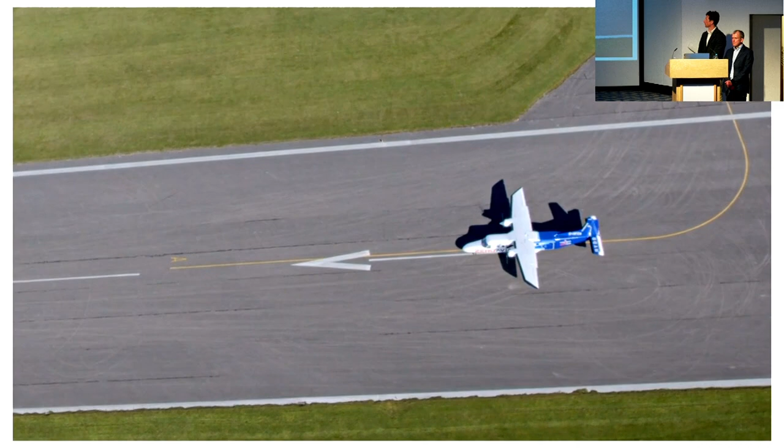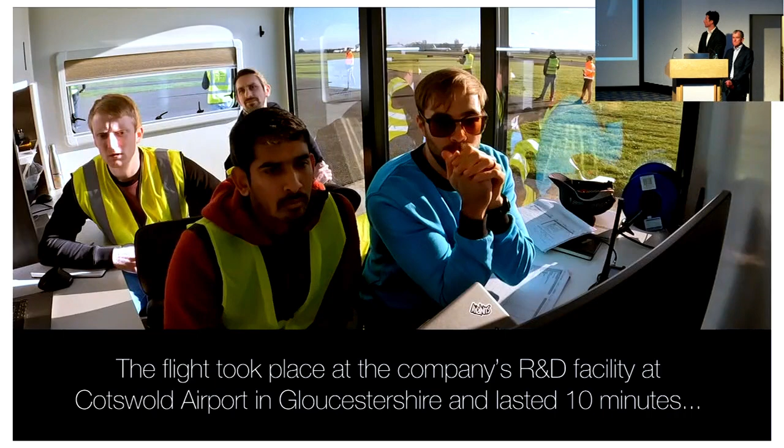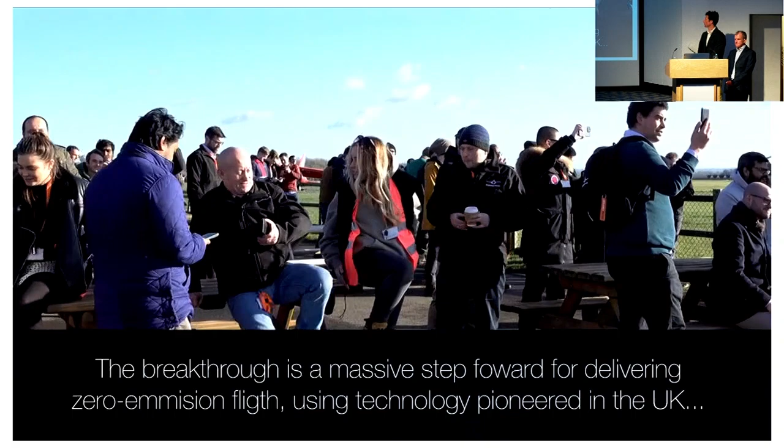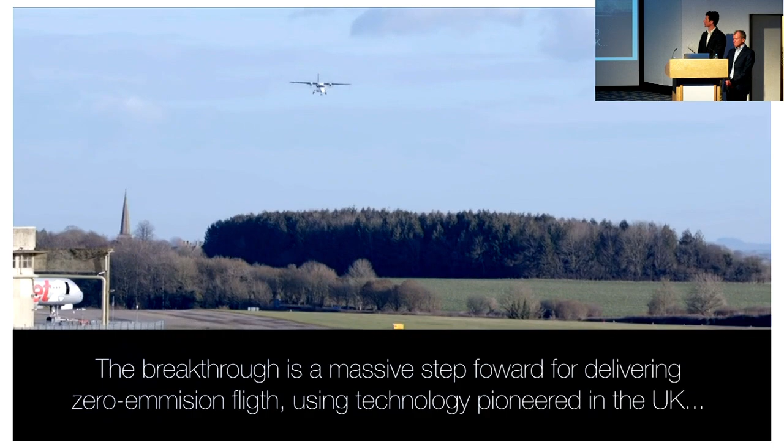Tango, contact tower, will make it 5 Quebec. Final line at 1. You ready? Doors and windows, door lights out. Takeoff brief is complete. Zero Alpha, runway 26, the wind 320, 5 knots. Take off your discretion. Temperature's good, temperature's looking good. Zero Alpha is downwind full stop at level 2,000 feet. Zero Alpha, full final, number 1. 120 knots. Zero Alpha, runway 26, land your discretion to wind 280 at 5 knots. This is still really good. Voltage has gone high with 790 reducing.

So hopefully that has whetted your appetite. This evening, this is what John and I will take you through. First of all, why we as a company are working on hydrogen electric. Then some of the technology behind that powertrain, principally how a hydrogen fuel cell works. And then how John and the team took that forward to that first flight that you've just seen in the video. And then I'll talk about how we progress that into a commercial future.

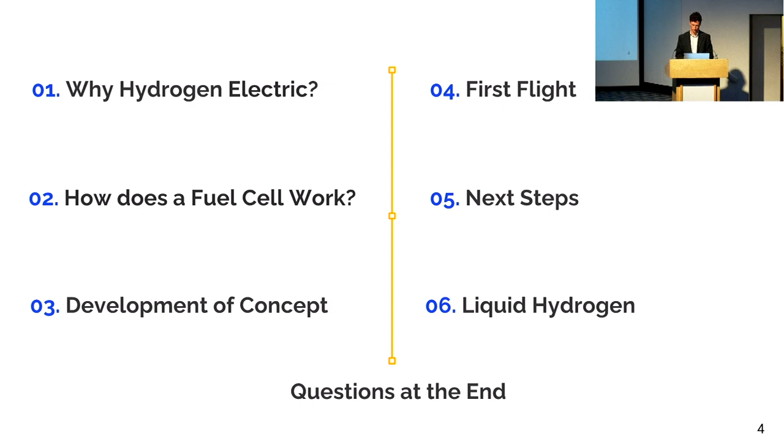So first of all, why hydrogen and electric aviation? Well, I guess the world is faced with that competing argument that aviation has got huge societal benefits, quite neatly summarised there by Bill Gates. But on the flip side of that are massive environmental and sustainability side effects. You can see in the graph that it's predicted that the use of aviation increases almost exponentially between now and 2050, but that drives a 25% increase in CO2 from aviation, whereas the world's intent is to drive those CO2 emissions down to net zero.

So it feels like we are at the threshold, the birth of the next aviation age, where the Comet ushered in passenger jet aviation for the masses, but now the world and our small part in it needs to take that on and make it sustainable so that everyone in the world can experience the benefits of aviation. Of note, only so far 10% of the world's population have flown in an aircraft, so there's a real driver for that increase in the use of aviation. So that's the problem set.

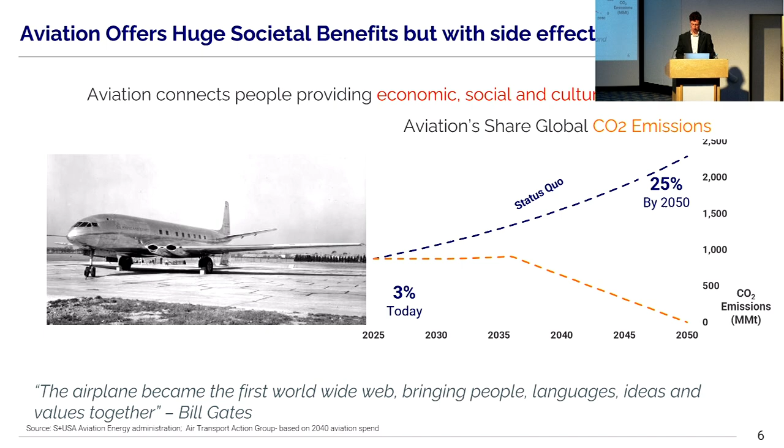Now we in ZeroAvia have focused on hydrogen, and in a minute I will talk about how that fits into perhaps the broader green or net zero solutions.

Hydrogen, as you all know, is abundant. Unlike fossil fuels, which we're going to run out of, 75% of the universe's mass is made up of hydrogen. It's got 3 times the energy density of jet fuel by weight, but the problem is in its gaseous form, it's very low density. That means that in, for example, those test flights, we had to store that hydrogen at 350 bar. That drives a large tank in terms of the strength you need, and thus the size of it. You really can't generate high pressures without a much larger and uneconomical tank. So we can use hydrogen, but it takes up a lot of space in gaseous form.

Maybe liquid hydrogen is the solution, but one of the troubles with that is its boiling point is minus 250 degrees centigrade, so that brings in a whole host of questions: how do you store liquid hydrogen, how do you produce it, and how do you then use it in an aviation context. All of those problems will start to unravel, hopefully, during this presentation.

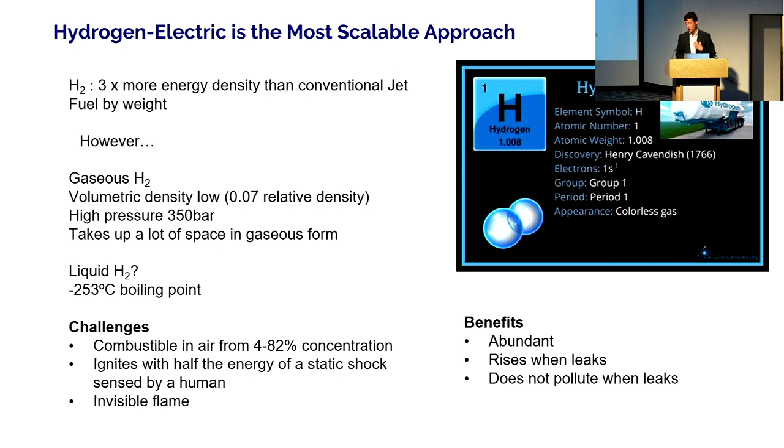So that's the challenge in front of us, but the reason why hydrogen, I genuinely believe, has got a key role to play in that kind of portfolio of green solutions.

We've got hydrogen electric, which is the ZeroAvia solution. That drives quite a bit of weight at the moment, and John will go into that powertrain shortly. We need to work on solutions for how you can store it in the smallest volume possible. Another problem is we generally store aviation fuel in the wings at the moment. Those wings, you can't store gaseous hydrogen or keep liquid hydrogen cooled in, so we need to store our hydrogen fuel in a different part of the aircraft.

The next one is you can combust hydrogen in turbines, for example. That does reduce CO2 emissions, obviously, but you cause other non-CO2 impacts, such as contrails and generating nitrogen oxide fumes. And you need to consume a lot of hydrogen, so you need even larger fuel tanks for that.

And we've got battery electric, and there are certified training aircraft out there, the Pipistrel Velis, but with current battery technology, such as lithium ion, it's heavy, so you really can't upscale that battery technology into larger aircraft. In my previous role, we flew the Pipistrel Velis electric aircraft, the two-seat trainer, but with that battery technology, you broadly got a maximum of a 30-minute training flight out of it. So not yet matching aviation fuel's performance.

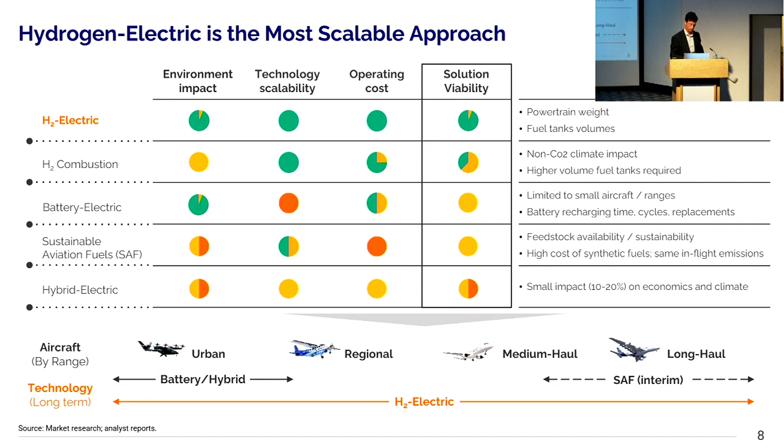So I'll hand back to John to talk about how fuel cells work. Oh, sorry, I've gone the wrong way. Classic.

Thanks. I'm going to caveat this with: I'm a pilot, not a physicist or a chemist, but that means it's going to be a simple explanation.

So the working principle of a fuel cell - fuel cells have been around in technology in other applications for quite a long time. We're using a proton exchange membrane type of fuel cell. It has a polymer and electrolyte catalyst that essentially separates the proton and the electron from the hydrogen molecules that enter at the anode. That electron is then used by us to generate an electric current to power our motors and turn the propeller. The combination on the other side with oxygen creates the byproduct of heat and water.

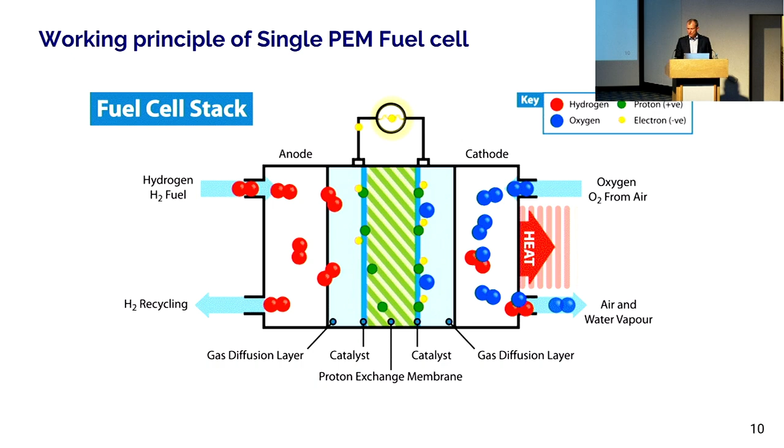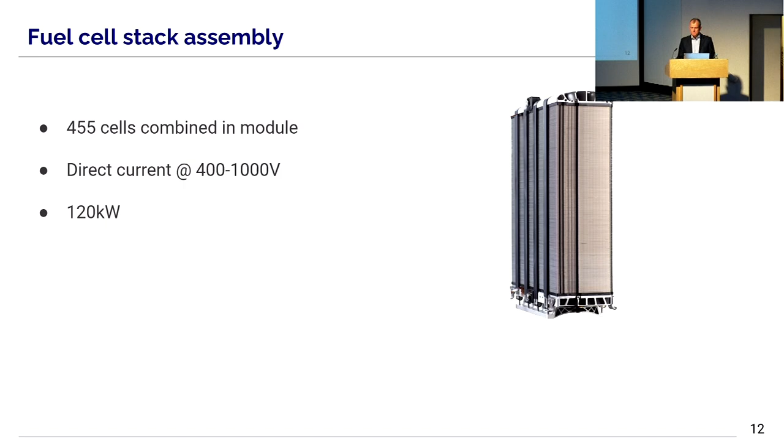We put 455 of those cells, combine them in a single module, and that will generate around 400 to 1,000 volts of direct current at about 120 kilowatts. So it's a building block approach, multiple cells combined in what we call a fuel cell stack.

We have to supply the hydrogen. As Adie's already mentioned, it comes from a gaseous form in a tank inside the aircraft. We provide oxygen to the cathode of the fuel cells, and that's provided in the form of compressed air. So that is compressed by a compressor similar to a turbo on a car engine, and is fed in at the correct partial pressure of oxygen to generate the chemical reaction.

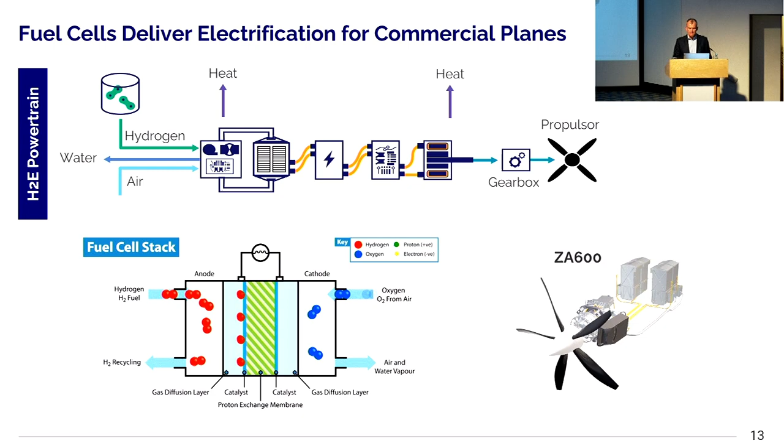That electricity is then dealt with through cabling to inverters that convert the electricity to AC current to drive the electric motors. The testbed aircraft that we're flying, and I'll talk more about that in a bit, includes 4 electric motors and 4 inverters, and they have a direct drive to a propeller.

Obviously, the 2 byproducts mentioned from the chemical reaction are heat and water. So we have to deal with that within the fuel cell system, and we include what we term a balance of plant. That includes the compressor, conditioning for the air going in, removing any particulates that may be in that air, compressing it and feeding it into the fuel cell. And on the other side, the hydrogen management is taking the gaseous form inside a tank that's in the fuselage through a pressure reduction down to around about 7 bar operating pressure that feeds into the fuel cell.

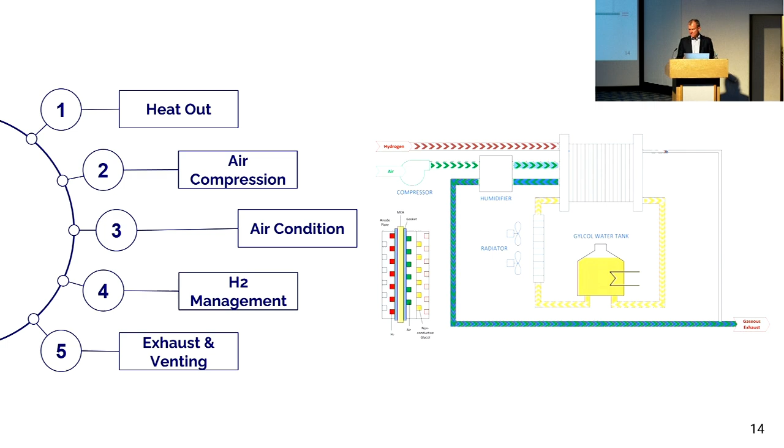The byproduct of heat obviously has a significant impact. The fuel cell operates at an optimum temperature of around about 68 to 70 degrees. That means that the water coming off very, very soon is forming a liquid form, and that's evacuated through an exhaust pipe under the aircraft, and you'll actually see that in a short video later. The heat is removed from the system by a liquid cooling system, much like you'd have in a car with the radiators, and airflow through the radiators on the outside of the aircraft, cooling the system, keeping it at the optimum temperature of 70 degrees.

Our total infrastructure looks something similar to that. You can see the motor and inverter unit at the front, the fuel cell stacks with balance of plant. The current system that we're operating weighs around about 190 kilos.

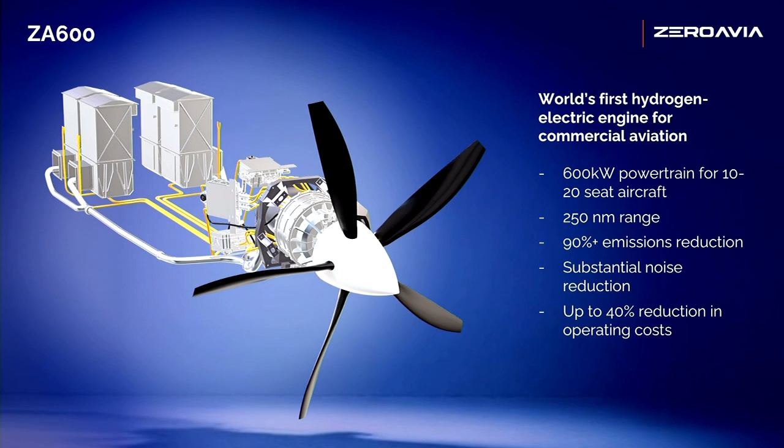It's nominally 600 kilowatts. At the research and development phase, we're generating around about 400 kilowatts of usable power, but our first product, the ZA600, will be operating up to 600 kilowatts, which will give us around about 250 nautical mile range with 90% emission reductions. We don't have the noise of a jet engine, obviously, but a lot of the noise is still generated by the propeller, and we estimate a 40% reduction in operating costs.

The test aircraft, in terms of our redundancy, we've got two 455-cell fuel cell stacks that generate around about 120 kilowatts each, and we've got a set of batteries that will generate an equivalent power. So in terms of redundancy for our flight test campaign, we've got two of the motors that are powered by the fuel cells and two of the motors that are powered by the batteries. The reason for that was there was input from the regulator very early on that because this was new and novel, they wanted to have some form of redundancy.

Essentially, because of the choice of aircraft we're using, we've got the turbine engine still on the right-hand side. So from a test and development program, the aircraft is safe to fly on one engine, but we've got that further redundancy.

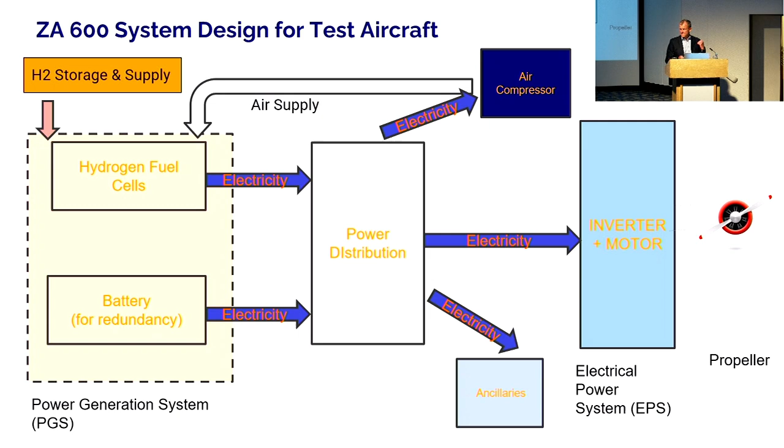The important thing to note, and the reason I want to talk about this slide in particular, is that if you look at the total weight of the fuel cell systems including the tank, for the same amount of flight availability and power generation, we've got over double the weight of batteries to provide the same amount of power. The battery weight at the moment is 900 kilos, and the fuel cell weight including the tank is around 450 kilos, with 5 kilos of hydrogen. So that puts into context the figures that Adi was talking about earlier.

So we've put that into a Dornier 228 aircraft. It's a fairly old platform. The aircraft we're flying was built in 1985, but it has incredible single engine performance. It's actually possible, although not certified, to take off from a standstill on one engine, and although not required for our flight performance, that's an amazing safety factor to have during a flight test campaign.

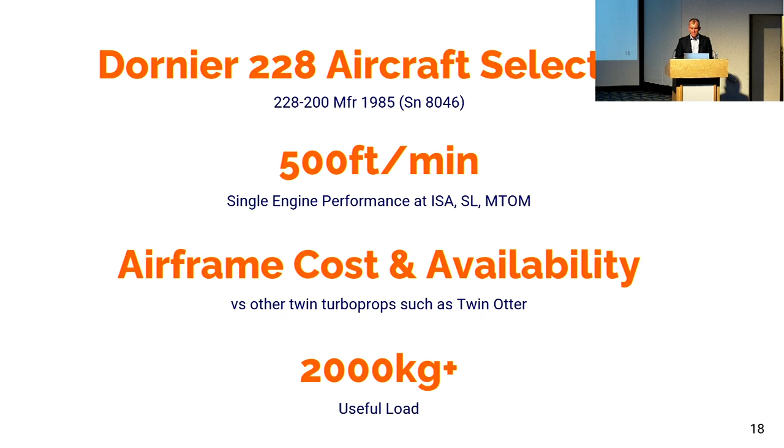There is a trade-off effectively between cost and availability. There are a number of other aircraft that would be equally good - the Twin Otter is a great example - but the net cost of the aircraft compared to the operating cost is a significant factor for us as a startup company. And we've got a very good useful load, so we're able to carry 2,000 kilos of weight.

So inside the aircraft, in the picture on the left, that's looking from the cockpit to the rear. You can see the hydrogen tank - that's 5 kilos of hydrogen in gaseous form at 350 bar. We've got the 2 stacks of batteries, which are lithium iron phosphate batteries, and right at the back are our 2 fuel cell stacks with balance of plant.

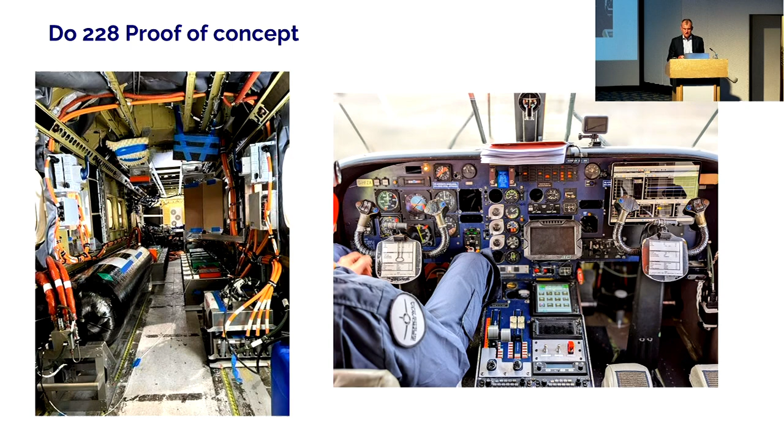Here it is in a little more detail. On the right-hand side, press the right button, we've got a tablet display. That gives the flight test engineer a bit more information, in particular about the operating temperatures of the fuel cells, so we can keep them within limits. We've got the pilot's display, which you saw in the previous picture, and you'll see that in another video and the next slide. Controls for the high voltage power - you can't see the low voltage power controls, but they're just down here. And that's me.

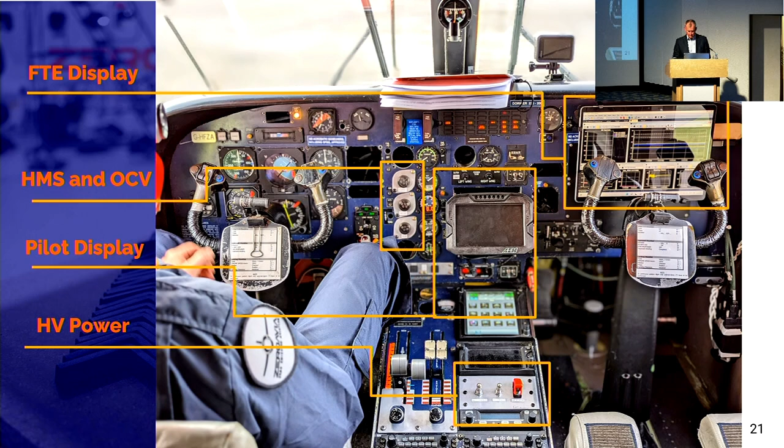This display is if anybody's into motor racing, you might recognise it. It's an automotive type display that's been customised to provide control information for the electric powertrain and associated warnings that might be associated with operating it.

Essentially, from a pilot's perspective, control of the electric powertrain is a torque control. So we'll demand per leg around about 800 newton meters of torque during the takeoff roll, and then we'll have a max continuous power of about 750 newton meters per leg. That's at the maximum power rating of 120 kilowatts per leg.

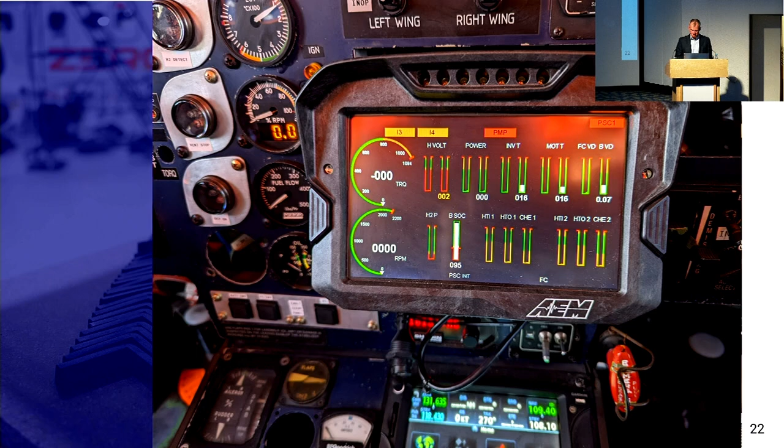We started our ground test campaign with a series of bench testers, and the aircraft was delivered to us in November 2021. We went through commissioning and ground testing before our flight test, first flight on the 19th of January. So from flash to bang, a very fast and rapid integration into the aircraft.

We use a lot of the existing technology for fuel cells, the experience for that, and electric powertrains comes from the automotive industry. So we have integrated a lot of automotive expertise into a new and growing aerospace company, and that comes with certain challenges.

We've looked at preparing not just the aircraft for flight test, but preparing the team, getting a group of very clever and motivated people to understand the aerospace aspects and the importance of safety and understanding the known unknowns into a test campaign. Part of that was the ABC of testing: assume nothing, believe no one, and check everything. You've got to have that rigour throughout that programme, which is the importance of bench testing, ground and commissioning and ground testing before you then go to do your successful first flight.

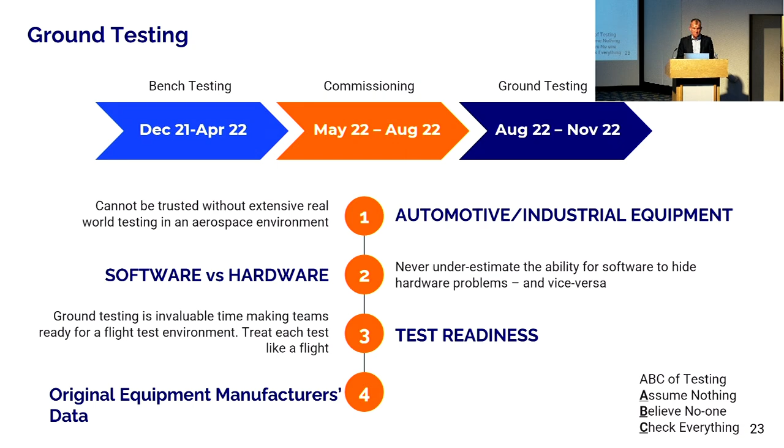This is an example of one of the early ground tests. This is the first fitment of the fuel cells into the aircraft. You can see a little bit more detail. Most of this is the balance of plant of the fuel cell. This one is end-on and this one is side-on. The conditioning for the air takes up the majority of the space within there. The actual fuel cell you can't see, but it's just a small kind of battery-sized device at the bottom.

It looks fairly rudimentary, but essentially once the fuel cells were in and were commissioned, we needed to have pipes running out to get rid of the electricity that they're generating, because we weren't sending that to a motor at that point, and that goes into a load bank. So the cables that you see there are all going off to load banks. This is low power testing, but it's that first commissioning run of the fuel cell. I took this video with my phone, so I do apologise for the quality.

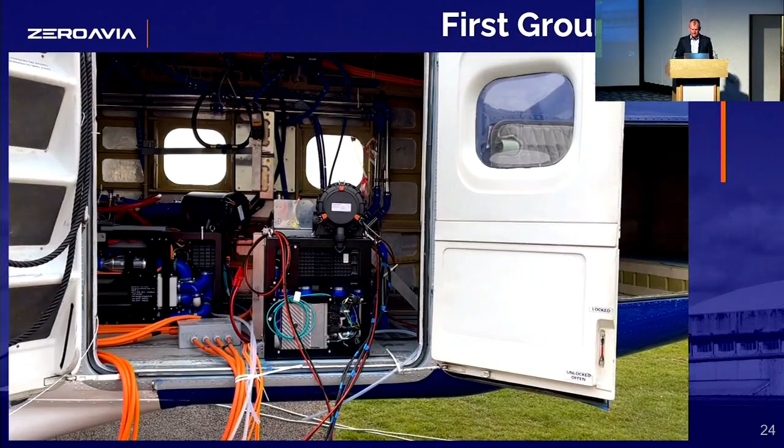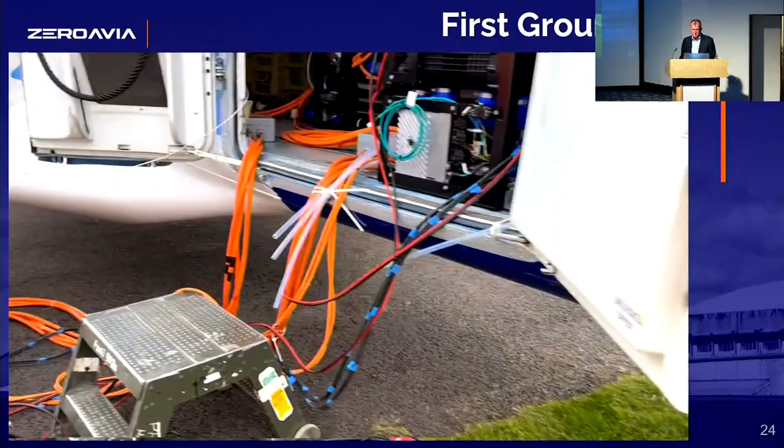That's the exhaust there, where the water vapour comes out. I think the important thing from a flight test perspective is to understand as much as you can on the ground, because on the ground it's ground zero. Once you get airborne, you don't want to be discovering new things in the air.

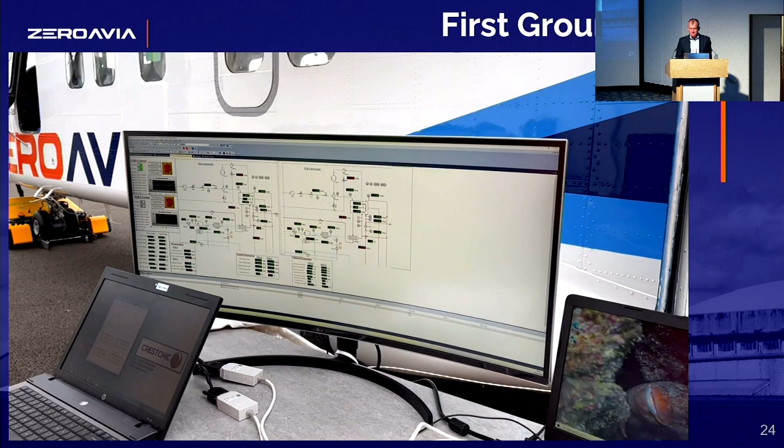Our first flight, as you've already heard, was on the 19th of January 2023. We've done 13 flights since then. The last flight for us was in April of last year.

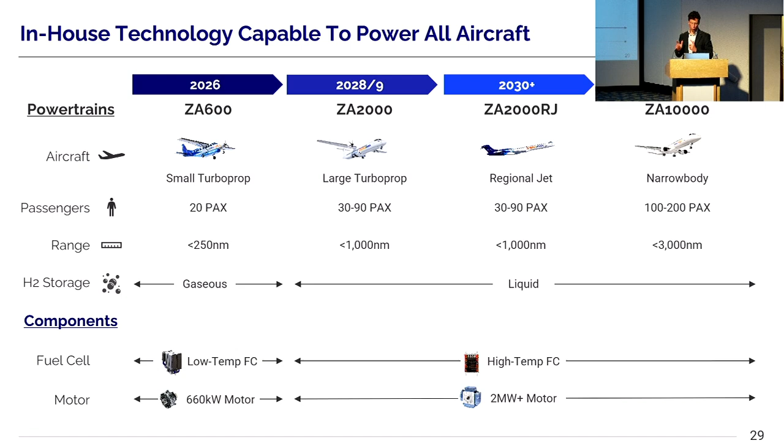Again, this picture just paints, whilst we are busy getting a certified powertrain certified, in parallel, technology needs to be advanced with things like liquid hydrogen tanks and those high temperature proton exchange membrane fuel cells.

And the way we're getting after that is ZeroAvia purchased a company based down in Sandwich in Kent, and those staff have now moved to where we're based at Kemble in Gloucestershire, and they are doing R&D now on those high temperature membranes. John's talked about the whole fuel cell comprising in the region of 455 individual cells. Right now, the team at Kemble are doing testing on those individual fuel cells and are progressing on a daily rate.

Liquid hydrogen tanks. In a minute I'll talk about what we've got planned for the rest of the year with flight testing with liquid hydrogen. But in parallel to that, we have UK government funding to develop liquid hydrogen tanks designed and manufactured in the UK. We're doing that because the current liquid hydrogen tanks are not large enough in terms of capacity for those larger uses.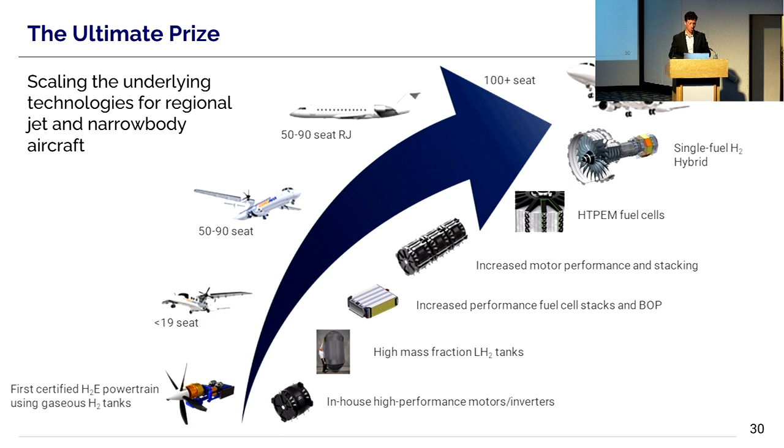Cool. So on to liquid hydrogen. So we are this year going to conduct ground and flight tests with a liquid hydrogen tank. It's essentially the same powertrain that John has described, but we remove the gaseous tank and replace it with a liquid tank. It's not quite so simple as unscrewing the tank from the floor and putting a new tank in, because it's quite a big weight and balance change.

That tank contains 16 kilos of hydrogen, so it's broadly the same volume as the gaseous tank. The gaseous tank stores 5 kilos, this stores 16 kilos. So you can see, even with an early prototype tank, you're getting significant increases in that storage capacity.

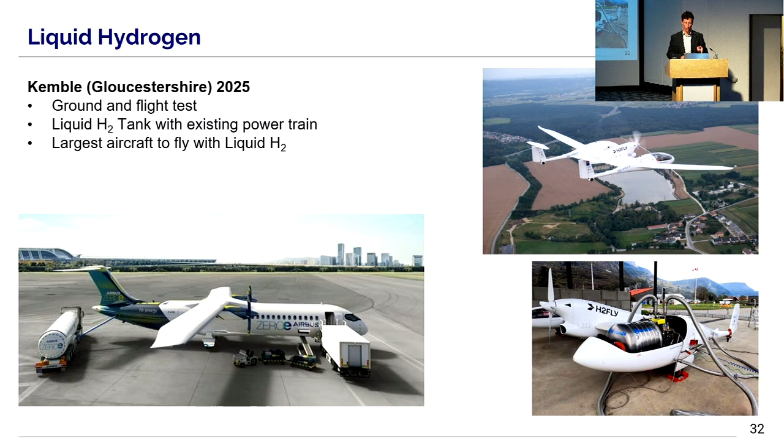And that is tangible liquid hydrogen testing that we'll see this year in the UK. If I leave you with one final thought to take away, it's that we've talked about how we'll mature the powertrain, and our first applications, once it's certified, will be retrofitting that to existing aircraft, like the ones you've seen throughout the presentation.

But ultimately, once the technology is proven, that could herald in a new threshold of how you design aircraft, because, as I said earlier, the wings are no longer a good place to store hydrogen. You need to store your liquid hydrogen fuel in tanks that are the best shape for it. So these are some of the simulations people have done, first of all with Airbus ZeroE, with that kind of blended wing concept, which may offer better internal volume for storage. And again, one of our ZeroAvia mock-ups shows how aircraft design may evolve dramatically off the back of that.